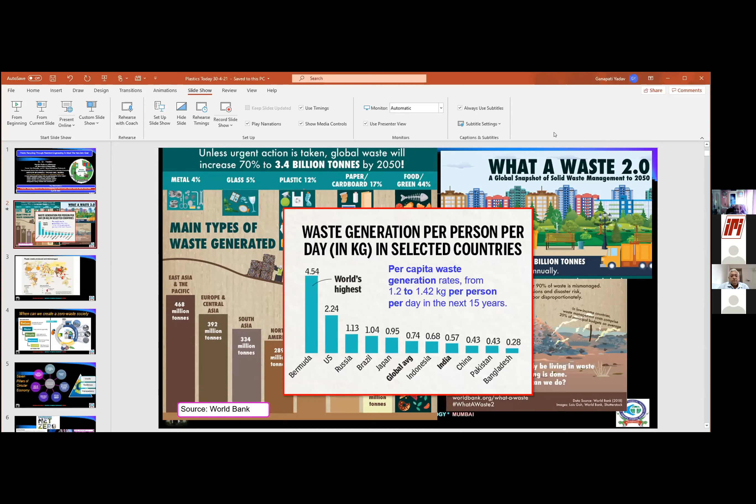Oh God, there is something. Okay, so you can see the waste which is generated... there is some problem here. Just one minute. I think, sir, you can continue. It's showing an advanced feature of the technology - whatever you're talking about is just coming on screen. But I don't want that. But that's fine, I think it's all the more better, sir - people can also read it and also hear you. Okay, all right, parallelly, all right, so okay, all right, okay.

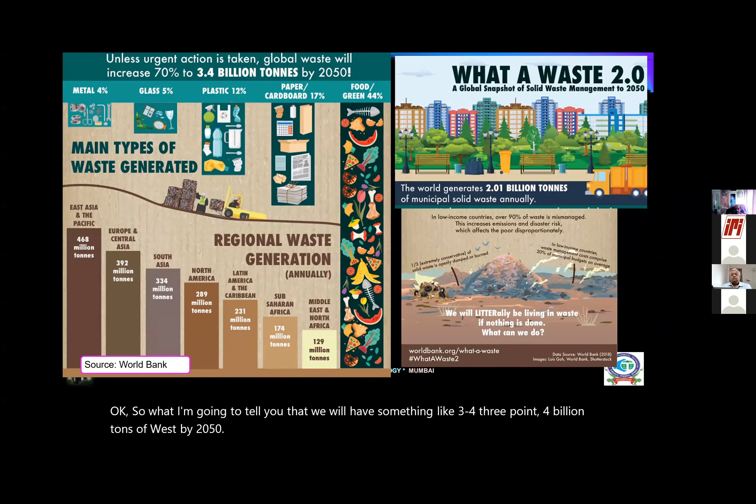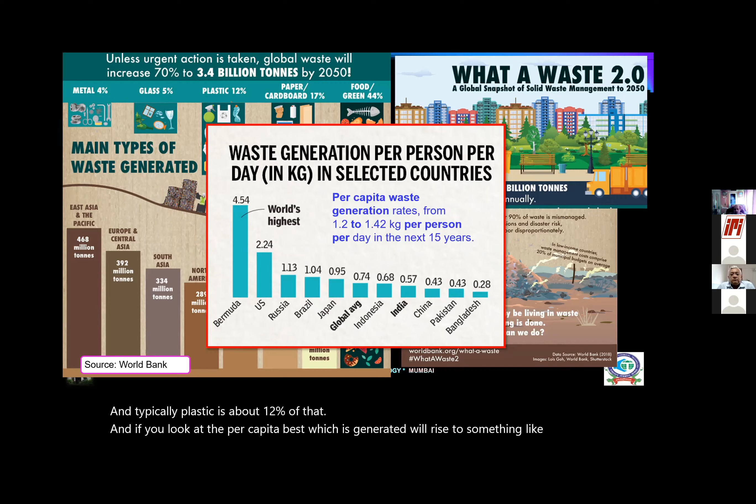So what I'm going to tell you is that we will have something like 3.4 billion tons of waste by 2050, and typically plastic is about 12% of that. If you look at the per capita waste which is generated, it will rise to something like 1.42 kg per person in the next 15 years. So what can we do - can we create a zero waste society?

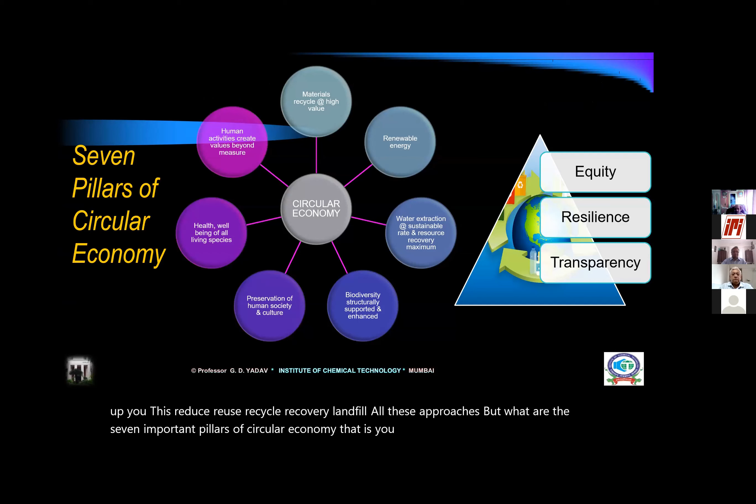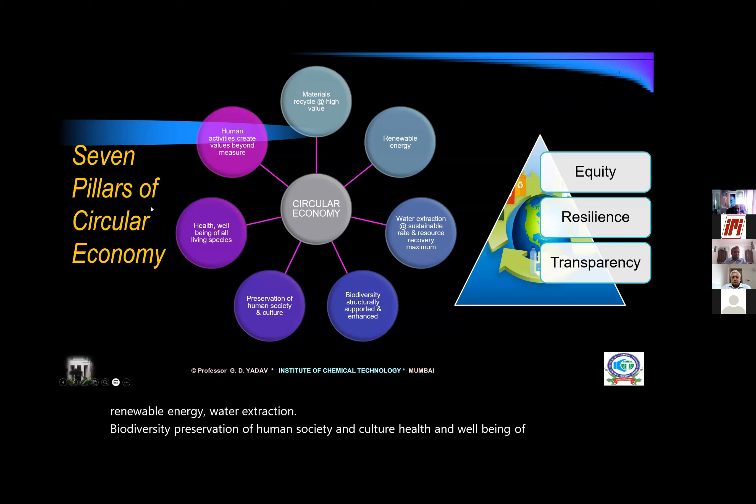And all of you know these reduce, reuse, recycle, recovery, landfill approaches. But what are the 7 important pillars of circular economy? That is, you have materials recycle, renewable energy, water extraction, biodiversity, preservation of human society and culture, health and well-being of all species, and human activities to create values beyond measurement. Okay, that is what it is.

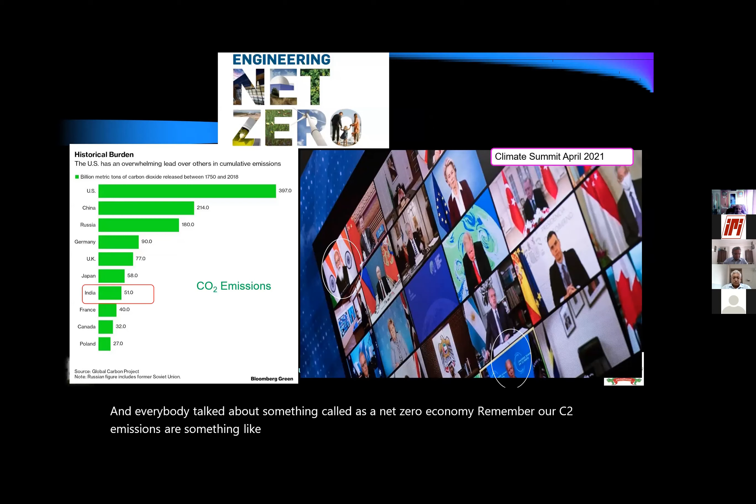And you heard last week there was this climate summit, and everybody talked about something called a net zero economy. Remember, our CO2 emissions are something like 51 billion metric tons. So now look at the CO2 going into the atmosphere: last year in January it was 410 ppm, this year it was 412, despite the slowdown in the economy. So how do you go for this so-called net zero economy?

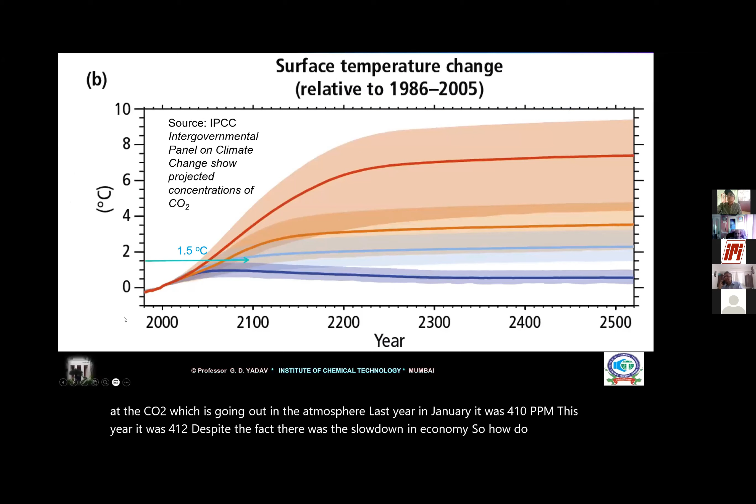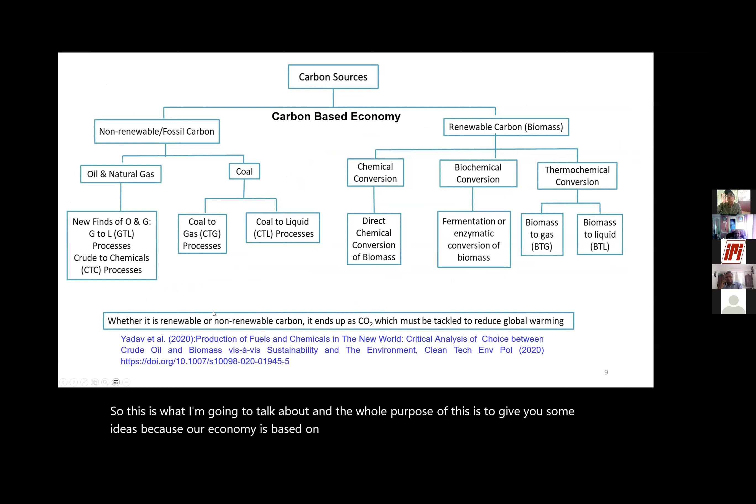So this is what I'm going to talk about, and the whole purpose is to give you some ideas, because our economy is based on carbon. Can we reduce carbon? Can we recycle? Can we reuse some of these ideas?

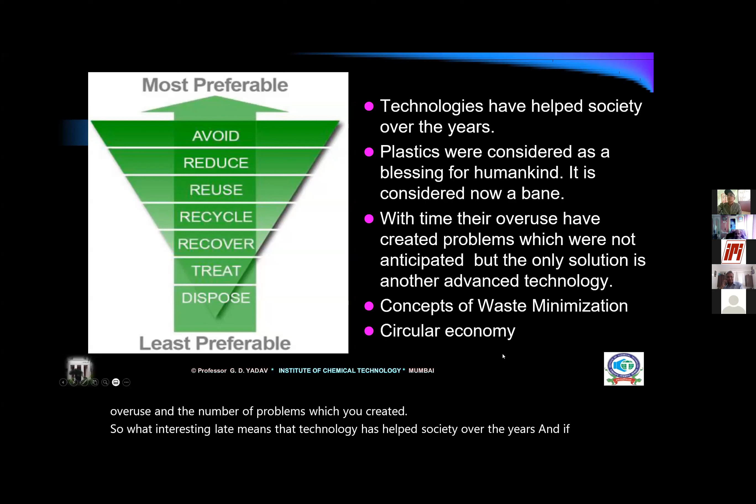One of the things is plastics. Plastics was considered a blessing for humankind, but now it is considered a bane because of overuse and the number of problems it created. Interestingly, technology has helped society over the years, and if one technology creates a problem, another technology will solve it. Since it was introduced, plastic has grown by 25 times.

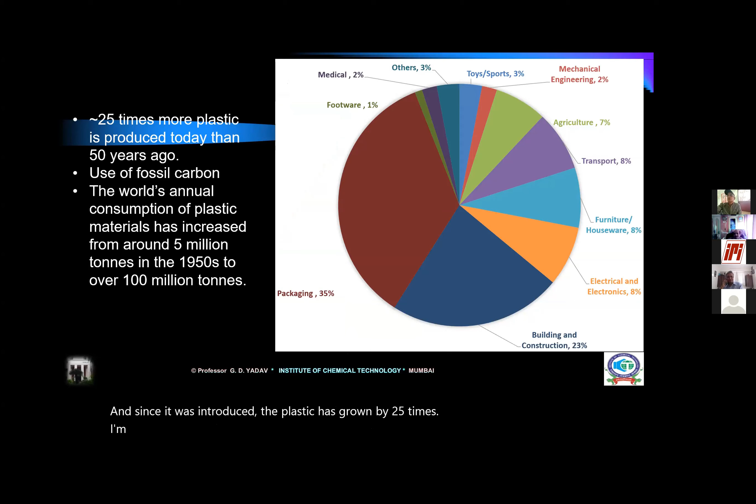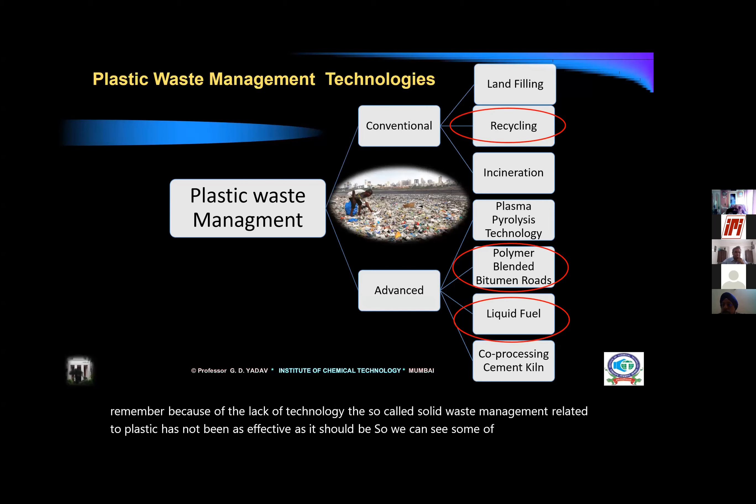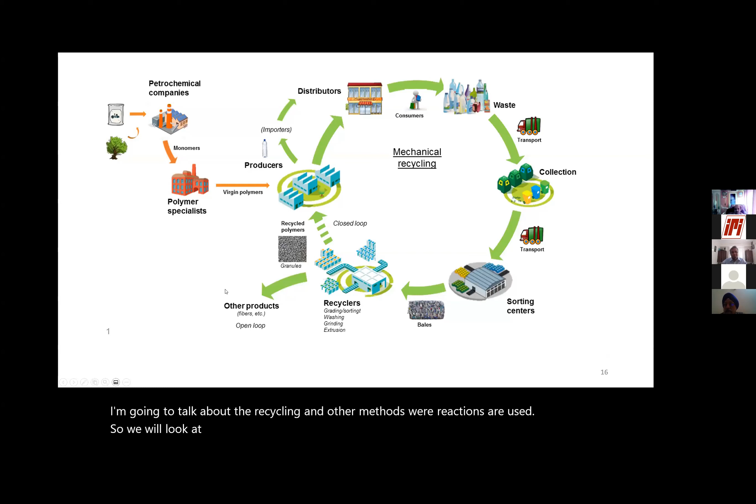So we can see some of these things, and I'm going to talk about recycling and other methods where reactions are used. So we will look at so-called chemical recycling processes. You have mechanical recycling and you have chemical recycling. In plastic waste recycling, I will consider the chemical and energy recovery part of the system.

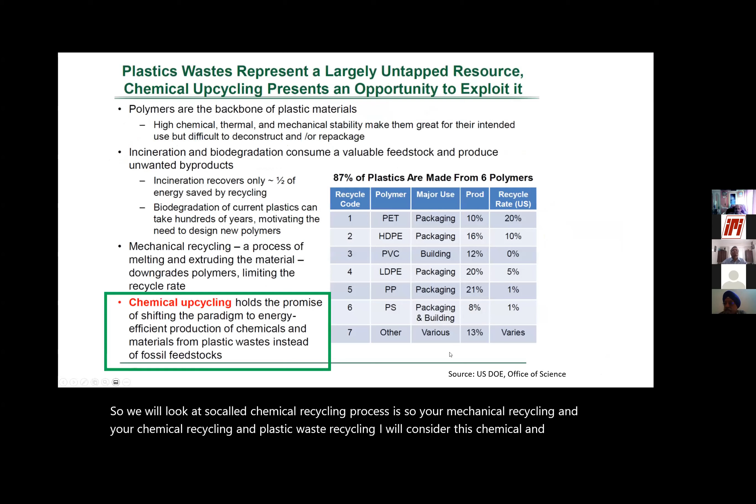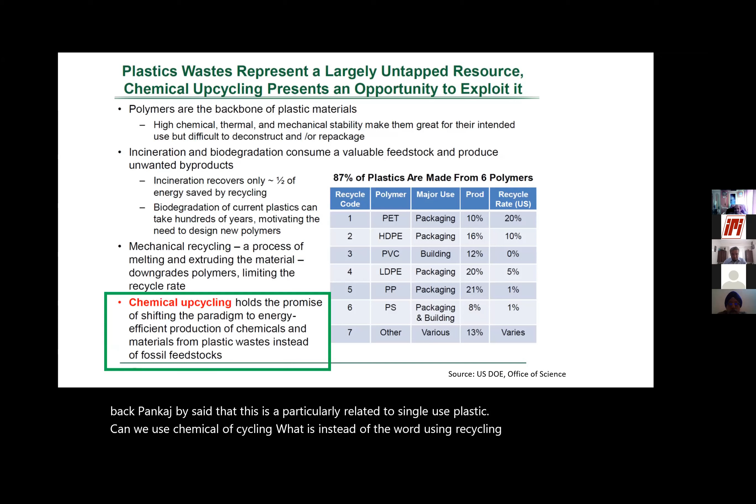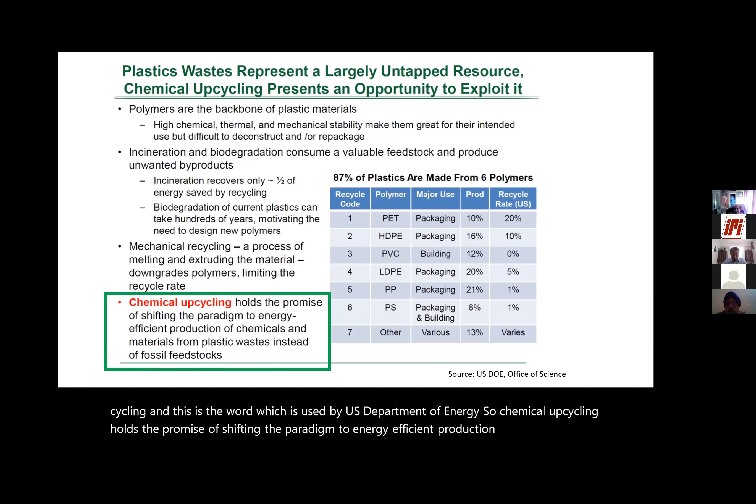Remember, plastic waste represents a largely untapped resource. Some time back, Pankaj Bhai said this is particularly related to single-use plastic. Can we use chemical upcycling? Instead of the word recycling, can we use upcycling? This is the word used by the US Department of Energy. So chemical upcycling holds the promise of shifting the paradigm to energy efficient production of chemicals and materials from plastic waste instead of fossil feedstock.

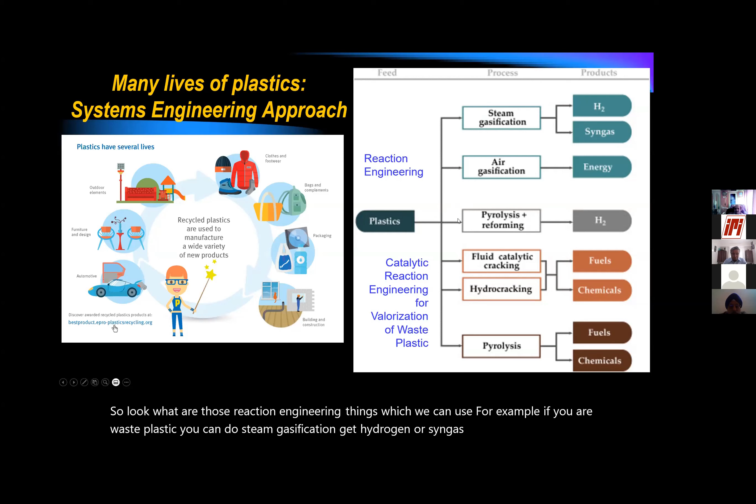So yes, in these recycling techniques we have chemolysis and thermolysis, and I will look at something related to polyurethane and other materials. So what are those reaction engineering things which we can use? For example, if you have waste plastic, you can do steam gasification to get hydrogen or syngas, air gasification, pyrolysis and reforming. Again you get hydrogen, FCC, and hydrocracking using hydrogen to make fuels and chemicals, and pyrolysis.

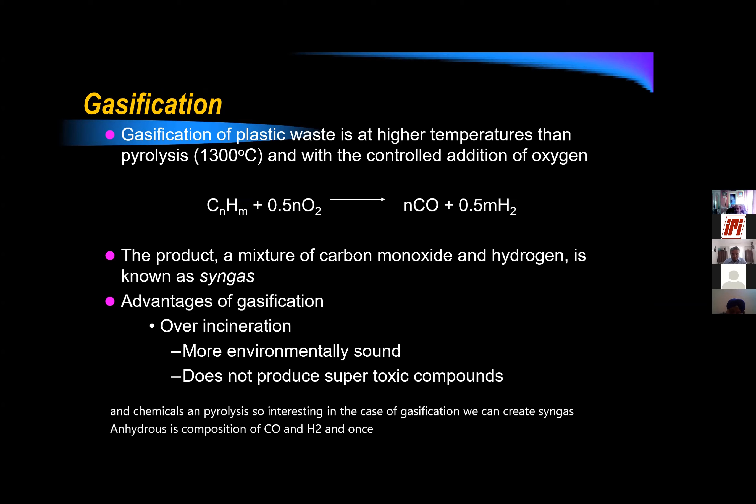Interestingly, in the case of gasification, we can create syngas and hydrogen. This is a composition of CO and H2. And once you have hydrogen, we can do many wonderful things in plastic reprocessing.

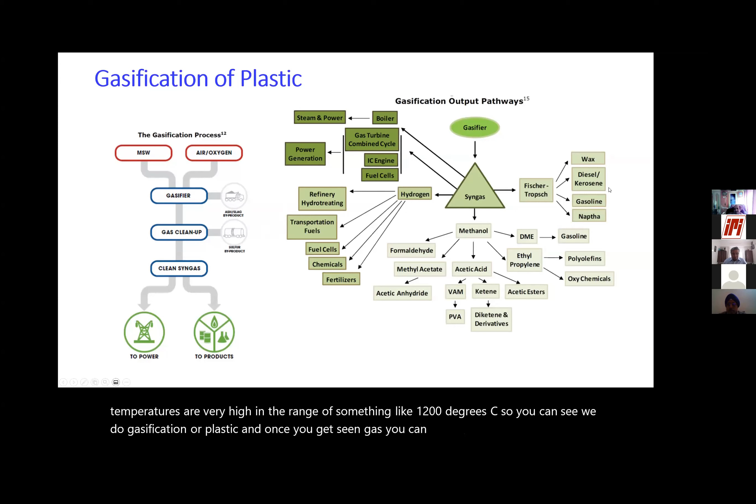In the typical gasification process, normally the temperatures are very high, in the range of something like 1200 degrees C. So if we do gasification of plastic and get syngas, you can create a large number of chemicals. The list is provided in this slide, particularly the one related to Fischer-Tropsch synthesis, or you go from syngas to methanol, dimethyl ether, gasoline, and so on.

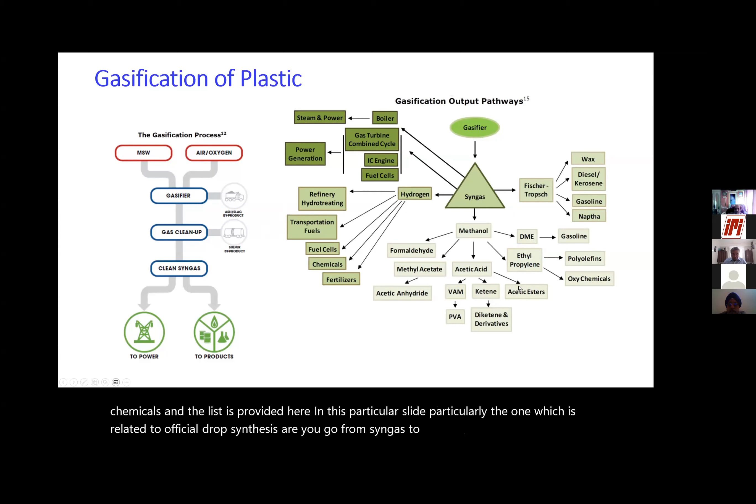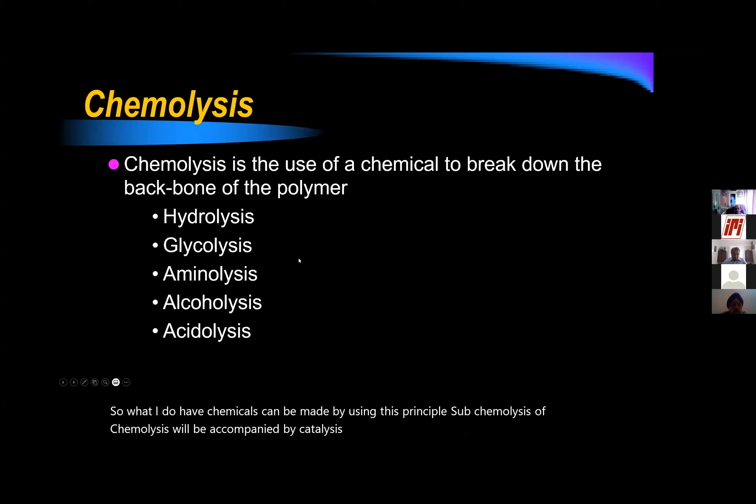So a variety of chemicals can be made by using these principles of chemolysis. Chemolysis will be accompanied by catalysis. And these are the reactions which you have: hydrolysis, glycolysis, aminolysis, etc.

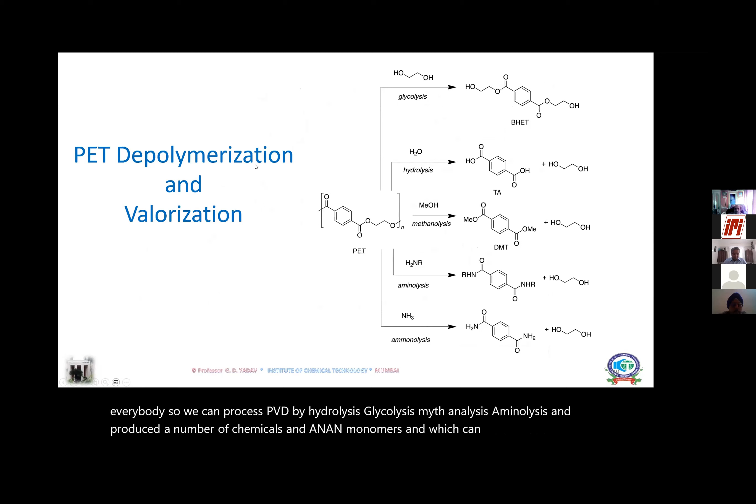For example, look at PET, which is a favorite of everybody. We can process PET by hydrolysis, glycolysis, methanolysis, aminolysis, and produce a number of chemicals and monomers which can be reused. So the depolymerization and valorization is a very important part. Perhaps PET is the largest plastic which is being recycled and reused. So these are the number of reactions.

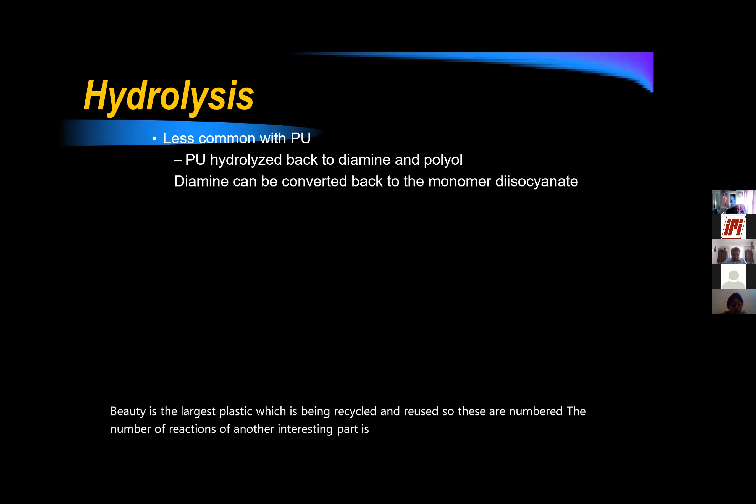Another interesting part is related to polyurethane. Polyurethane can be hydrolyzed chemically to make diamines and glycols. Or in the case of glycolysis, you use one of the glycols like ethylene glycol and glycerol to break down the polymeric backbone. And this is what is done in the case of polyurethane.

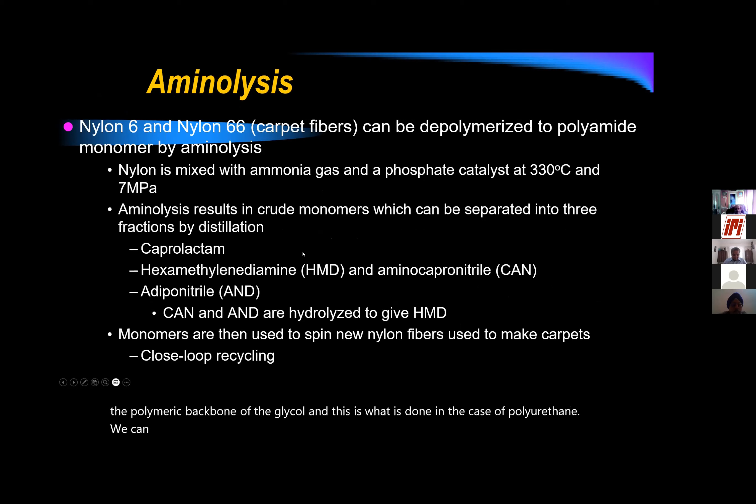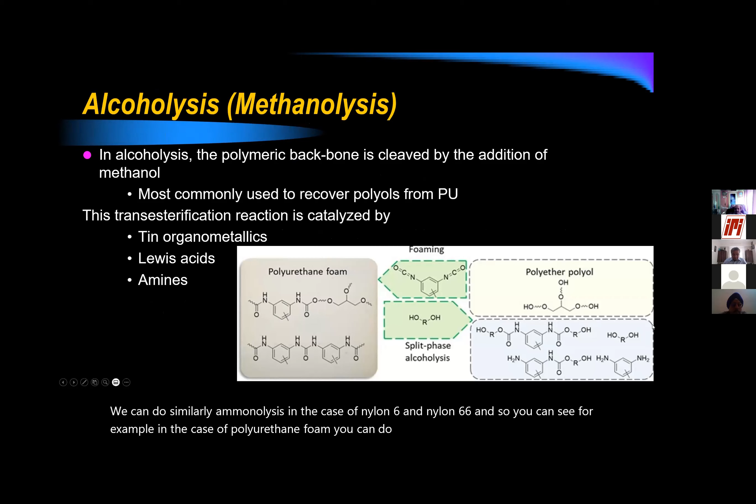We can do similar aminolysis in the case of nylon 6 and nylon 6,6. And in the case of polyurethane foam, you can do methanolysis and get polyether polyols, and you can split this by alcoholysis. So a large number of these products can be made from polyurethane foam.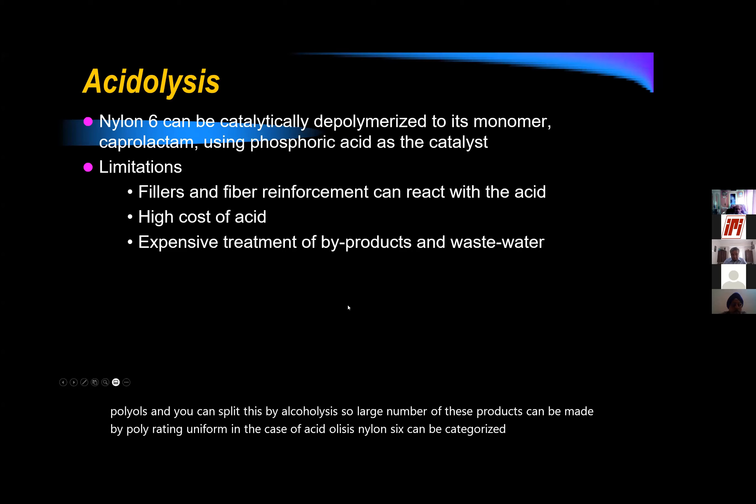In the case of acidolysis, nylon 6 can be catalytically depolymerized to its monomer caprolactam, using phosphoric acid as a catalyst. There are many other catalysts which can be used. So chemolysis will be very important to synthesize or resynthesize polymers.

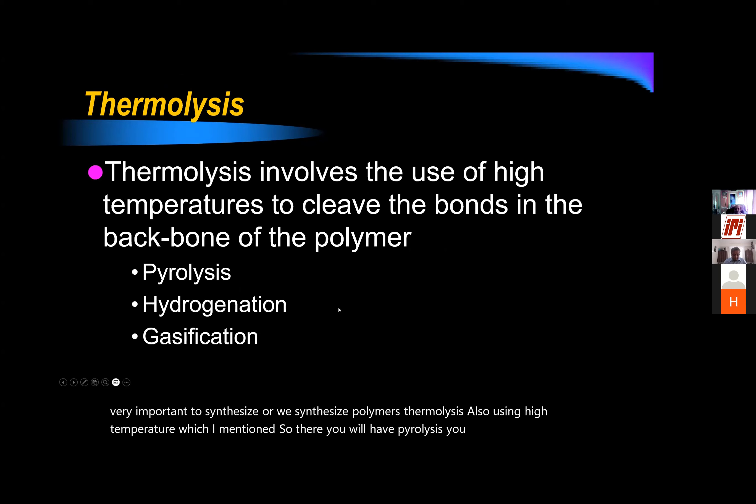Thermolysis also uses high temperature, which I mentioned. So there you have pyrolysis, cracking using hydrogen, so hydrocracking, and gasification. A large number of these processes have been developed in the literature, so you don't have to despair.

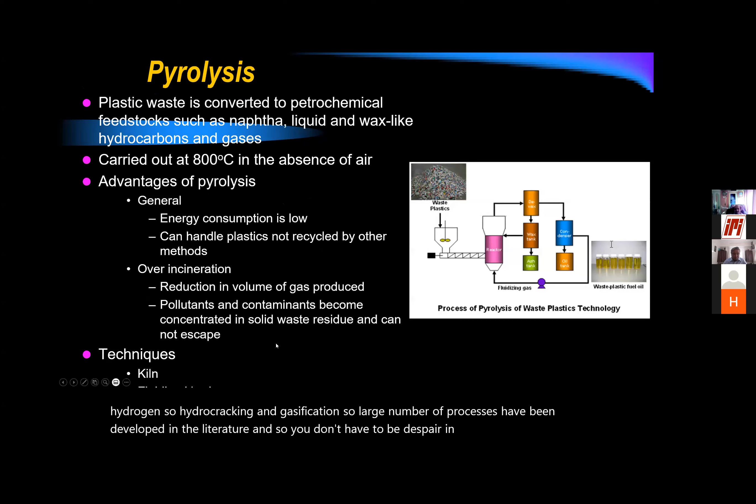We can use this waste plastic and do pyrolysis. There are techniques using kiln pyrolysis, and for example, when you have pyrolysis and you get a poor fuel oil, it has to be hydrogenated, and that can be done to get better quality oil.

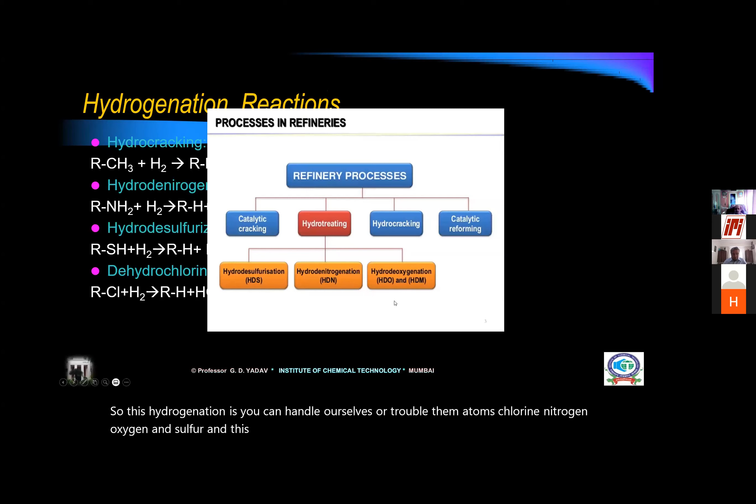This hydrogenation can handle all sorts of troublesome atoms like chlorine, nitrogen, oxygen, and sulfur. This is very well known in refinery processes. The same thing can be used for all plastic waste - PVC, PET, polyamides, rubbers, and whatnot.

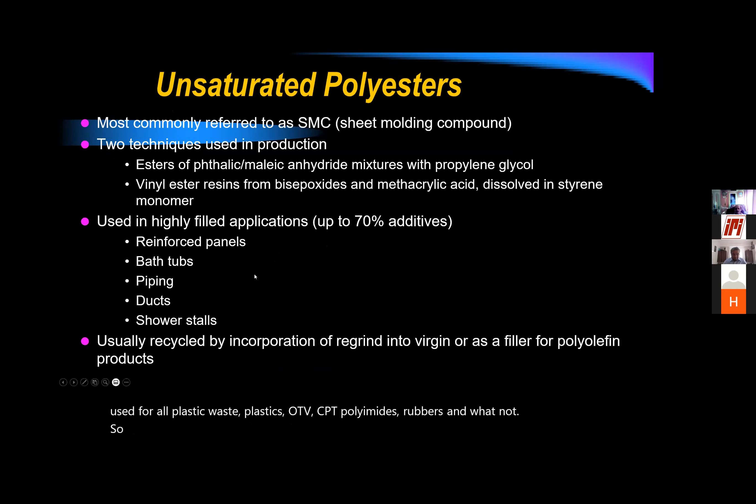Similarly, we can look at unsaturated polyesters, and all these polyesters can be reused. For example, you have melamine and urea resins - they can be recycled by partial regrind into virgin material.

For example, polystyrene foam is one of the biggest problems for the world, but we have many technical solutions. One very recent paper, which came out last year, showed you can produce hydrogen and methane from this styrofoam, and both of these are very valuable gases in industry.

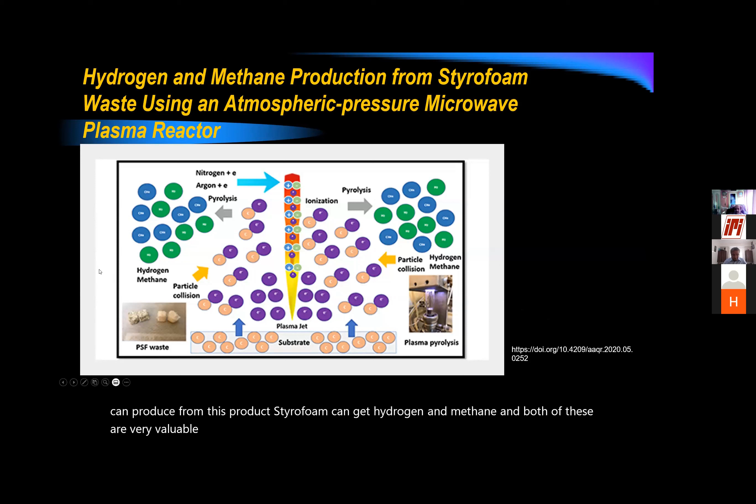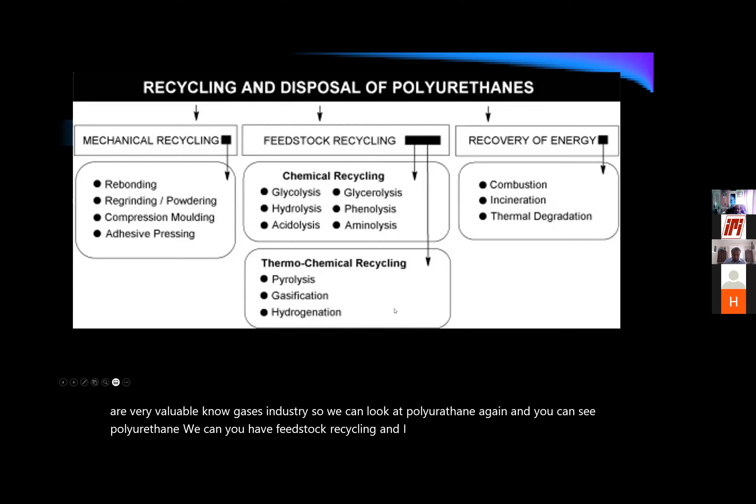We can look at polyurethane again - you have feedstock recycling, and I was talking about the chemical recycling. So many of these things you can have in polyurethane.

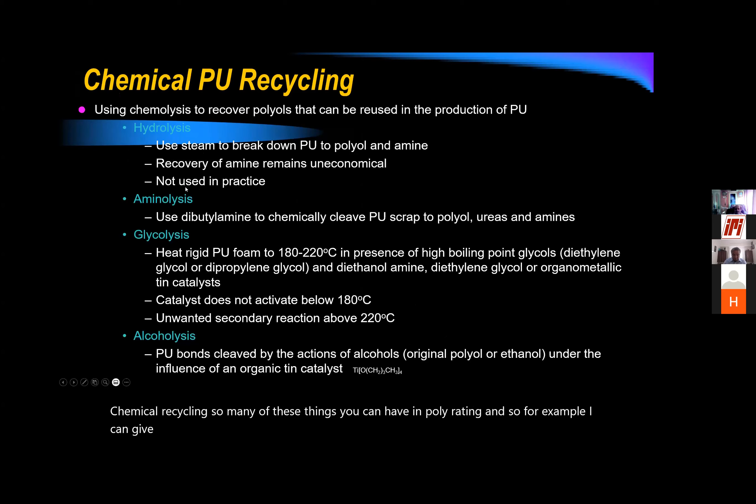For example, I can give you chemical ones like hydrolysis, aminolysis, glycolysis, and alcoholysis. All of these things are used for polyurethane, or we can recover energy. This means waste plastic doesn't have to be a burden on the environment - we can have smart technology, so we need to design better plants for recycling this plastic.

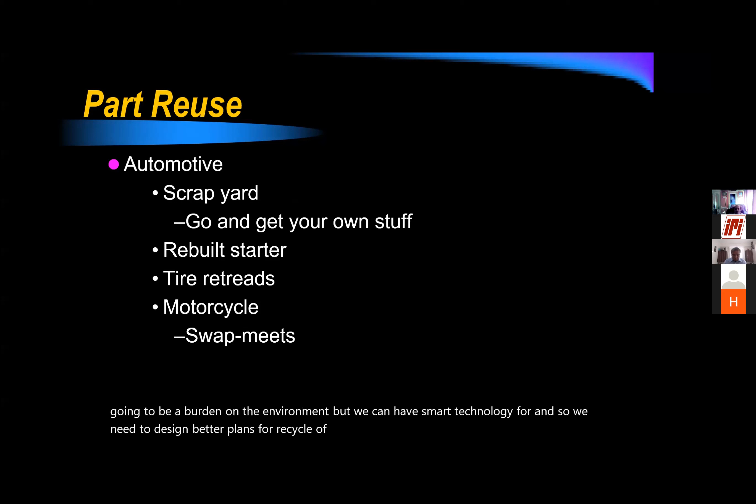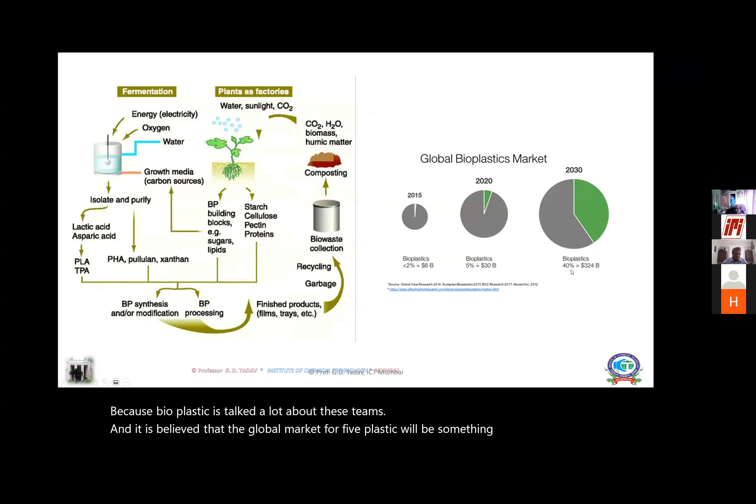Towards the last part of my talk, something related to bio-based plastic, because bioplastic is talked about a lot these days. It is believed that the global market for bioplastic will grow by something like 40%, reaching about 324 billion by 2030. So this is very huge.

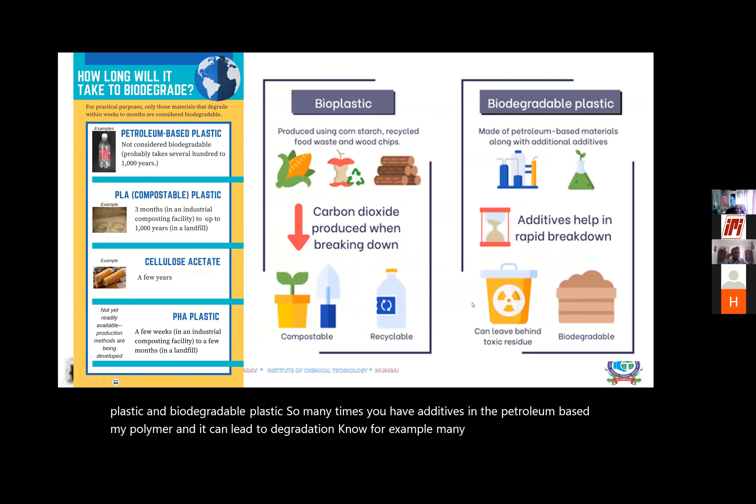There is a difference between bioplastic and biodegradable plastic. Many times you have additives in the petroleum-based polymer, and it can lead to degradation. For example, many of these bacteria start degradation by incorporation of oxygen into the molecule. So we know that we can do it.

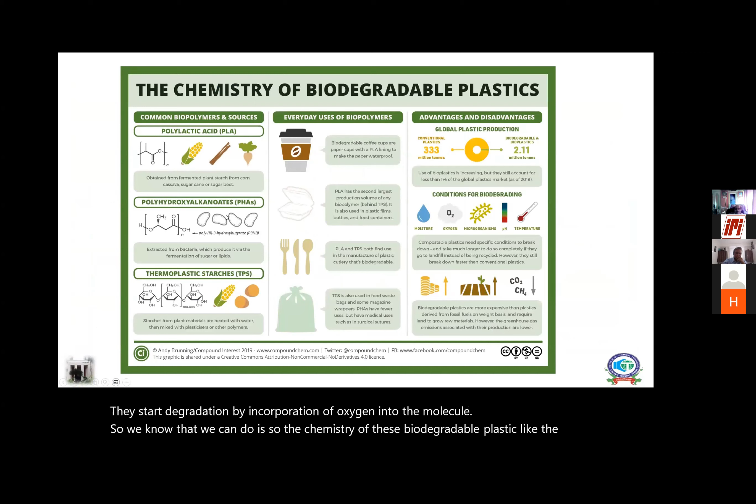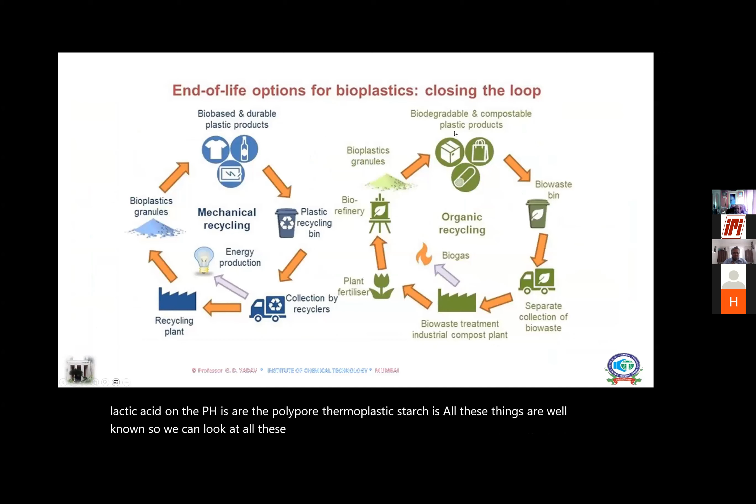The chemistry of biodegradable plastics, like polylactic acid and PHAs, or thermoplastic starches - all these things are well known. So we can look at all these things, and you have biodegradable and compostable plastic products, which can be recycled very easily.

Very recently, there was a paper by Chinese authors. What they are talking about is blending two enantiomer polymers inside a plastic that can withstand high temperature, expanding its usefulness further. And so, the so-called polymer upcycling - single-use plastics can be converted into a variety of new products.

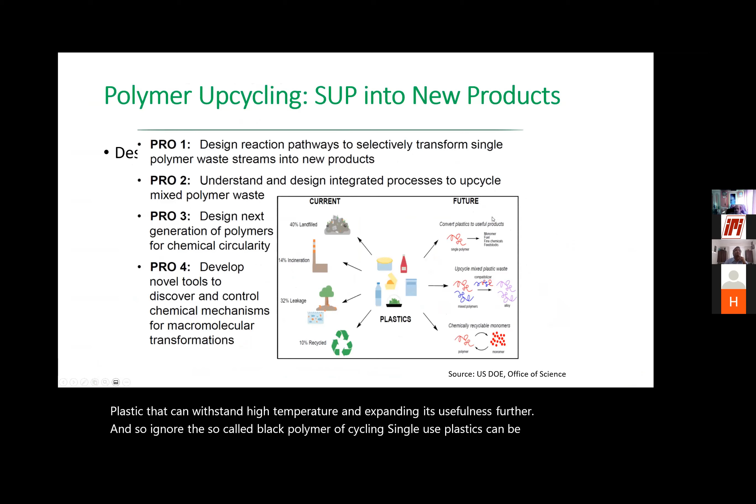We can convert into useful products. How do you do that? For example, you have to design new types of catalysts for depolymerization, including materials like polyethylene, which can be degraded into useful products anywhere between C3 to C20. So you can have a lot of fuels.

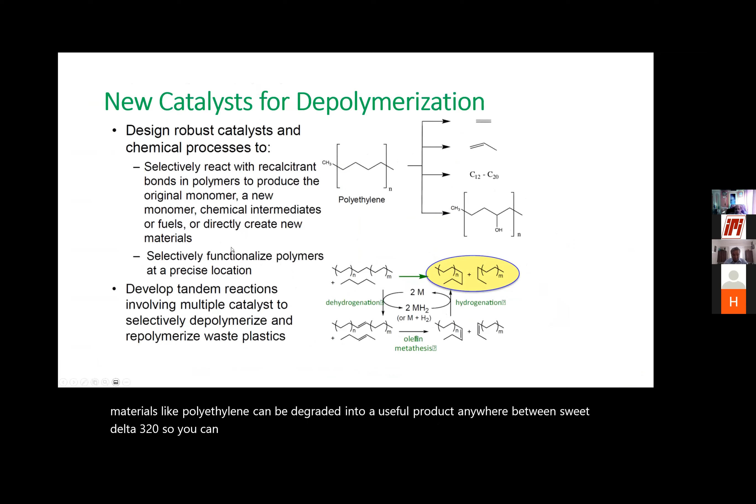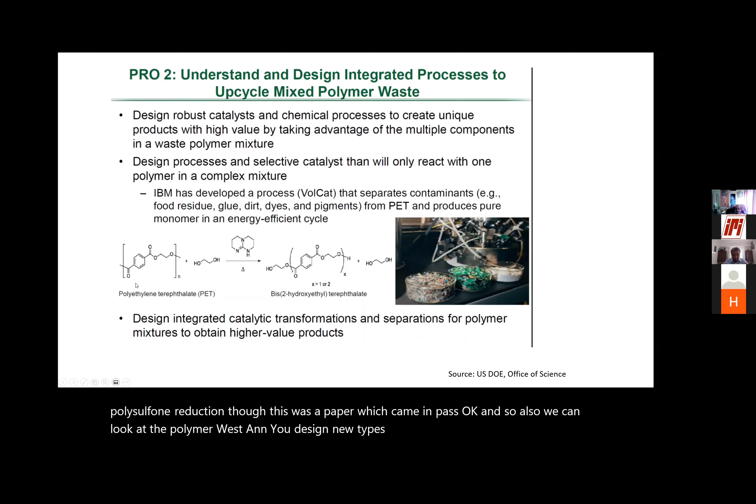In the case of next generation polymers for chemical circularity, we have to design and synthesize polymers with properties similar to or better than the current material. That is possible because of the lot of new developments in this field. We can also have new strategies for depolymerization and repolymerization, and that is what so-called upcycling means.

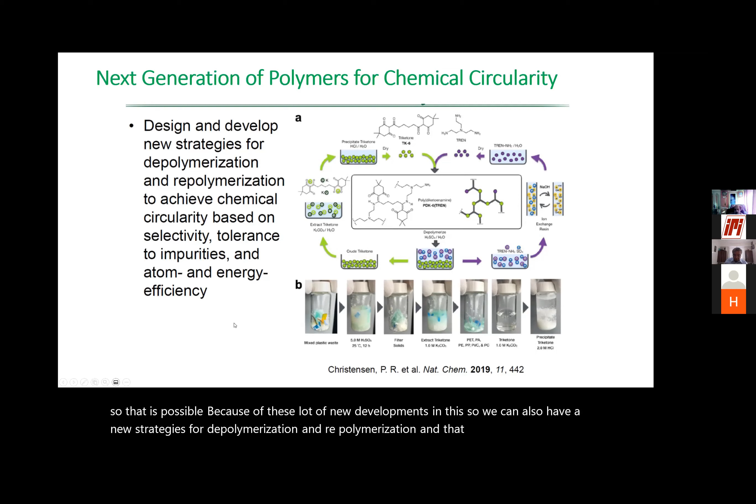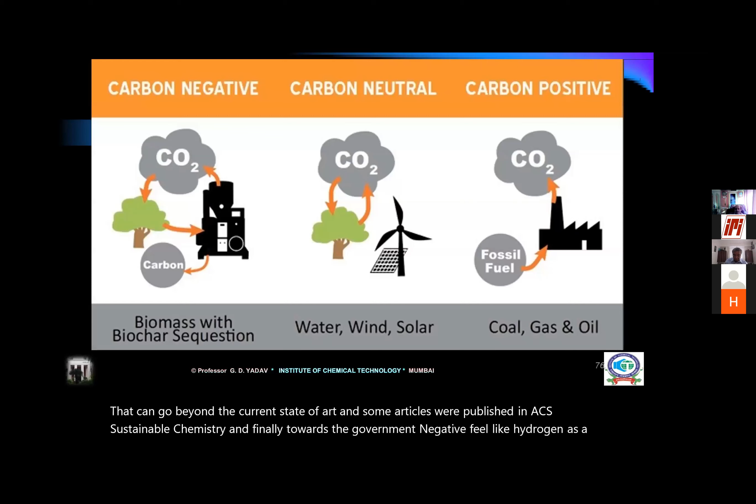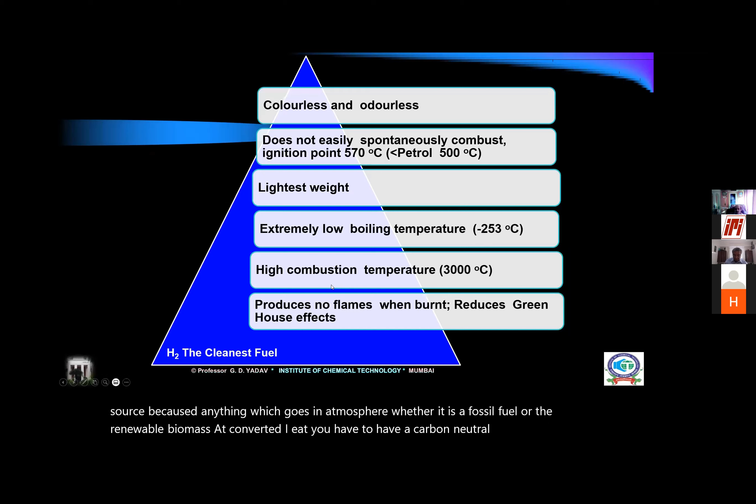So we have to understand, design, and develop reversible polymer chemistries that can go beyond the current state of art. Some articles were published in ACS Sustainable Chemistry. And finally, it was the carbon negative fuel, like hydrogen as a source, because anything which goes in atmosphere, whether it is fossil fuel or renewable biomass converted, you have to have a carbon neutral or carbon negative.

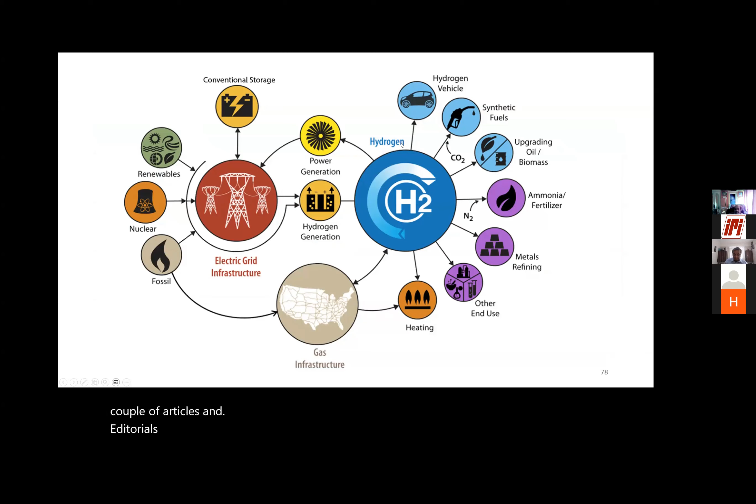So hydrogen is the best source, being the cleanest fuel. So once you have hydrogen, I wrote a couple of articles and editorials very recently in a newspaper. You can see, if you have hydrogen, you can have hydrogen vehicle, synthetic fuel, upgrading of oil, biomass, waste plastic, ammonia, metal refining, and many things. So hydrogen is going to be a very important source.

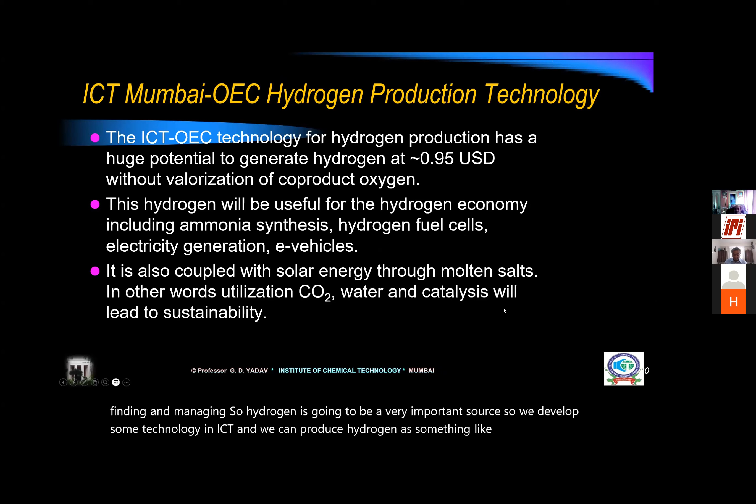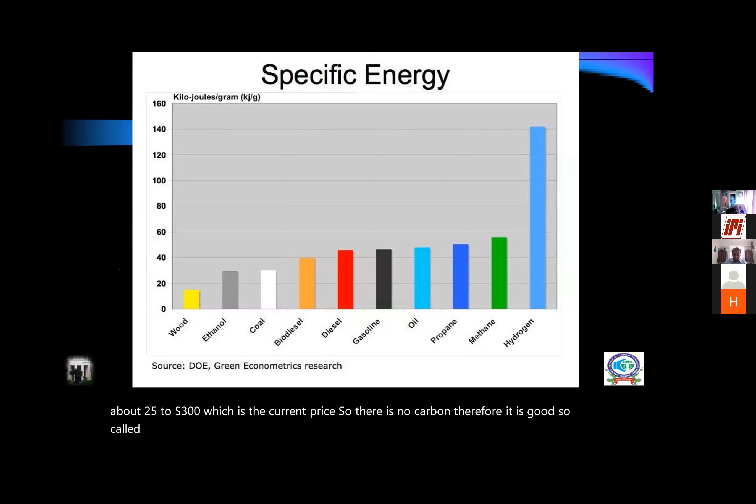So we developed some technology in ICT, and we can produce hydrogen at something like 95 cents as against about $2.5 to $3, which is the current price. So there is no carbon, therefore it is good. So the so-called net zero economy, it is going to help us. Hydrogen is going to help us. So there are many production technologies.

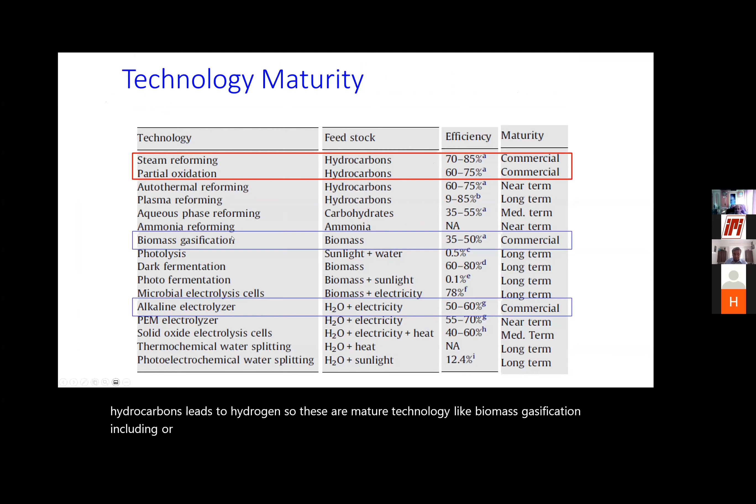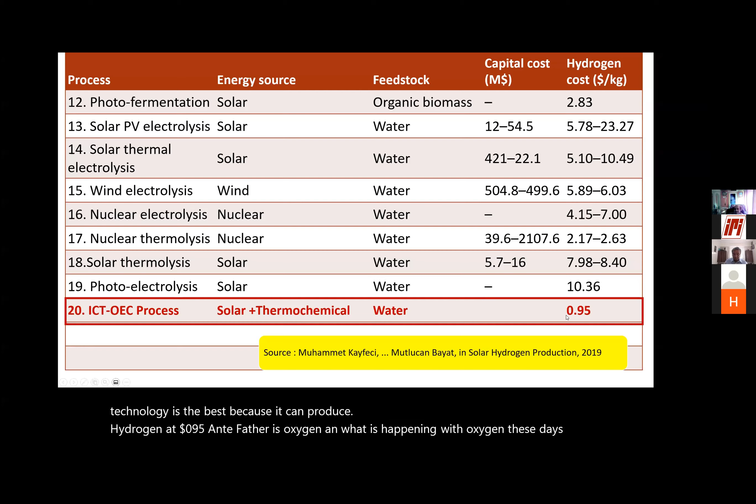Since I don't have much time, I will only go to the last part, that is the steam reforming and partial oxidation of hydrocarbons leads to hydrogen. These are mature technologies like biomass gasification, including what I told you about the waste plastic gasification. So in this particular case, we have compared something like 19 technologies available in the market, and we find our technology is the best because it can produce hydrogen at $0.95, and the other is oxygen, and you know what is happening with oxygen these days. So that does not include the valorization of oxygen.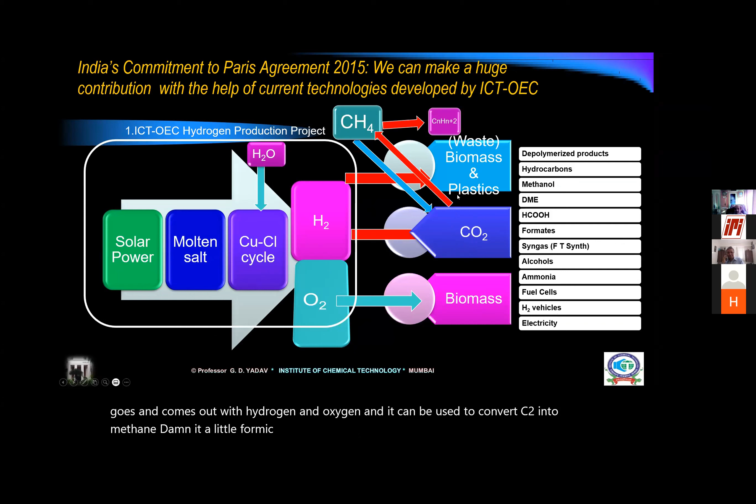So in our process, what we have done, we have solar energy, molten salt, we have a copper chlorine cycle where water goes in and comes out with hydrogen and oxygen, and it can be used to convert CO2 into methane, dimethyl ether, formic acid, and whatnot, including waste plastic. So you can see the number of products which can be made by using this hydrogen, including formic acid, which will go in fuel cells and whatnot.

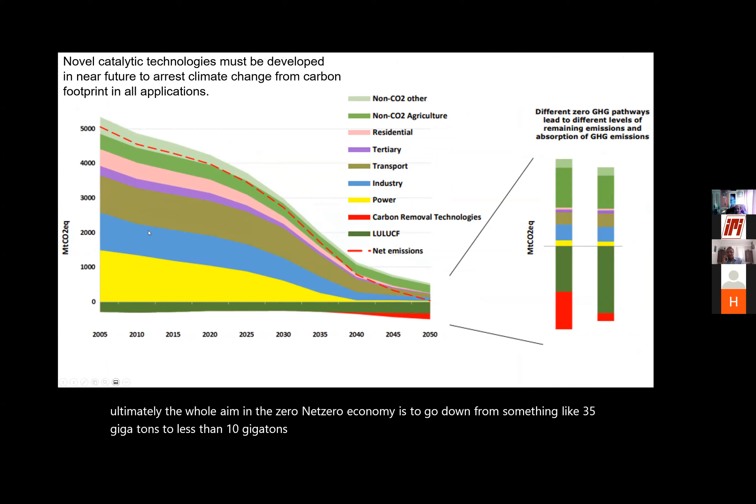So yes, ultimately the whole aim in the net zero economy is to go down from something like 35 gigatons to less than 10 gigatons of carbon dioxide in the atmosphere by 2050. So this is where the whole thing is. So finally, we will have a great future. Polymer people or the plastic fellows will not worry about it.

Nothing should be taken as waste because we must aim towards a zero waste society. Polymer upcycling is deconstruction and reconstruction of waste polymer for its valorization. So plastic can be recycled chemically with proper strategy, including depolymerization. The environment will protect it. So catalytic reaction engineering will be the tool for this.

Hydrogen will play an important role in net zero economy. And hydrogen economy can be elegantly intertwined to make many, many chemicals from waste carbon sources, including biomass, plastic, and C1 off gases. And government of India should adopt hydrogen economy to meet the demands of the Paris Agreement. That is the only way to meet the goals of the Paris Agreement. And of course, there will be many technological challenges ahead, and I'm sure science will take care of it. Thank you very much.

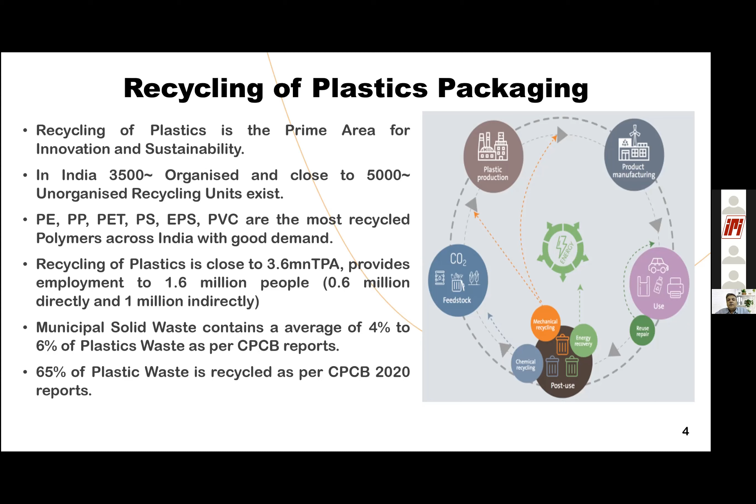Municipal solid waste contains an average of 4% to 6% plastic waste as per CPCB reports. 65% of plastic waste is recycled as per CPCB 2020 reports.

What are the current issues we are talking about? One is the regulations coming in - the new PWM guidelines, the new EPR rules, the SUP rules. They are all going to hamper the plastic industry, and even the recycling industry. Because today, if you see the new PWM rules, recyclers are part of the EPR Act. They are part of the PWM Act, they have been made part of it too.

Reasons why plastic recyclers are unorganized is purely because of the regulations. The pollution approvals required for becoming an organized recycler are not suitable for each and every recycler. If they really want to follow the norms, they have to change all their equipment and the way they are doing recycling. And if they change the way they are recycling, they will not be able to do the recycling they are currently doing.

Really, if you want to see the way unorganized recyclers are doing it, I think Samir can take you to a few of these recyclers who are doing all the road waste recycling and still surviving.

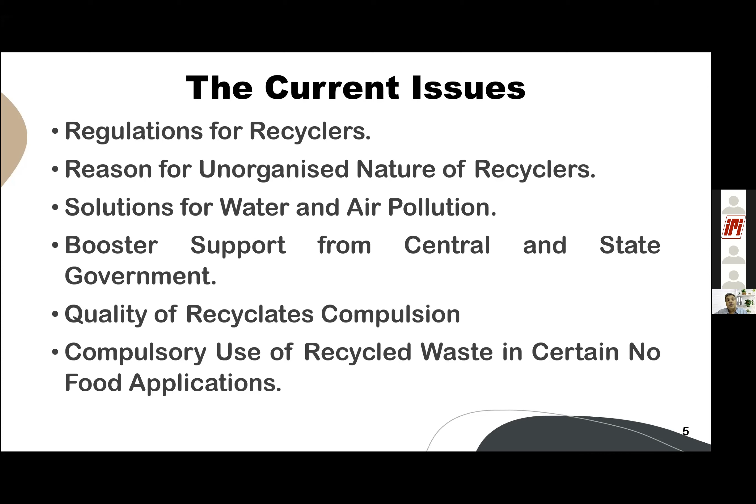Plastic waste management 2021 onwards, what would be the needs post 2021? One is, as I said earlier, improvement in recycling technology. Latest trends of equipment should be required. Recyclers would need to follow the guidelines for plastic pollution regulations and have equipment which would adapt to those regulations. They would need ETP plants for water recycling and reuse. Water is going to be a shortage in the future, so more and more regulations will be there from the government.

India would have to have social and environmental responsibility. A zero waste economy would need to be implemented if India needs to be totally plastic waste free. The number of dumps that are increasing in India need to reduce, otherwise India would be flooded with just waste. Sustainable solutions for value recovery of plastics is the most important point that needs to be taken care of.

Is it moving down? Oh yeah, it's going slow. Just a moment.

About Recykal quickly, we are a waste management company, and what we are trying to do is enable waste commerce through a digital marketplace. We connect all stakeholders in the ecosystem, from generators to processors and recyclers, bringing them onto a single platform. We come from a background of e-commerce and SaaS, and we are technocrats, so we are trying to use our expertise and knowledge in waste management to see what we can do better in this space.

Each transaction that happens needs a lot of transparency and traceability. Today, we are working with more than 100 brands, around 150 recyclers, more than 54 municipalities, doing almost 10,000 plus metric tons per month, and working with all the bulk generators.

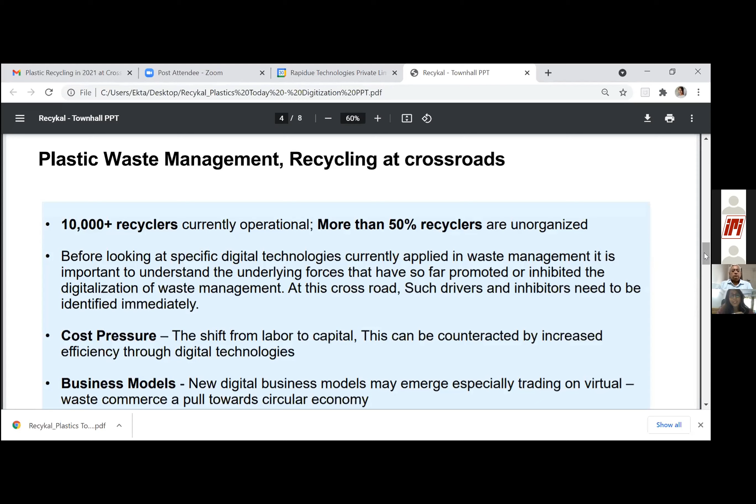But what inhibits it is cost pressure and identifying the right business model. These are the new things we need to work around and understand what would fit best. Digital technologies come with a promise of a more efficient process, better sourcing of valuable material in the waste stream, and an effective link to other sectors for a complete circular economy. I think that is what Sir was presenting in his previous presentation.

At Recykal, we have tried to build apps where the collection process to disposal process can be tracked. There are various generators, then somewhere collection is happening, and then there is a point where it is disposed. Disposal largely today is reaching the landfills and water bodies where it's mismanaged.

That's why people are saying say no to plastic, and we want to say yes to plastic. We all know it's a beautiful material. It's bringing so much ease to our life.

So what have we done at the informal sector, the generator level, consumers and bulk generators? We have tried to digitize. There are apps which connect to the collection centers, the nearest collection center in the particular city or locality.

Today, the most important inhibitor is also the price factor. Do we really know what's the fair price of the material? There are so many types of plastics and there's no proper uniformity. So there's an online catalog for market rates as per current trends that we are trying to maintain.

We are trying to bring this segment of small kabadiwalas and waste pickers access to banking so that there is online payment transaction. Today we are all in that space of GPay, RTGS, NEFT, so why cash transactions? In the COVID situation, everyone has learned the power of online payments. Every sabjiwala or fruit vendor has got a QR code in front of his cart, so this is very easy and it can be done.

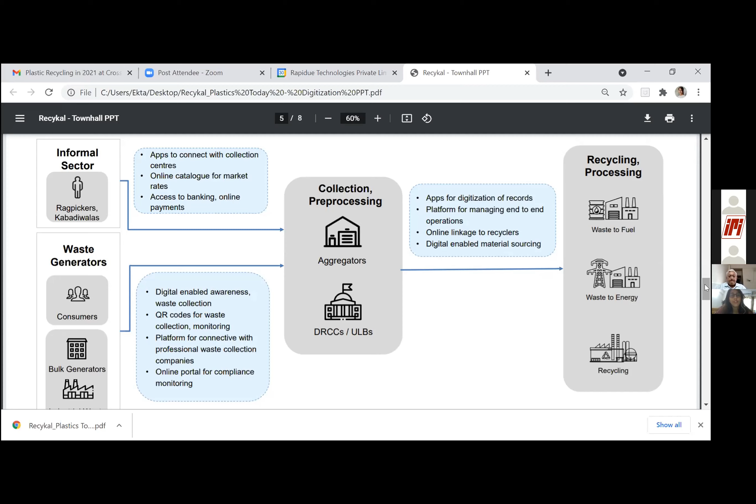That's what we are bringing at Recykal - waste commerce. We've all heard of e-commerce, but yes, it is time to have waste commerce, because it is not waste, we know it's material, but we still have to use this word. I hate to use it, but I'm forced to because I cannot create a new word suddenly - people have to understand what we are speaking about. So we still use the word waste, and that's where we are trying to show the value. As Sir was just speaking, value recovery of plastic - that's where Recykal is working.

So the digitization part I explained in my previous slide - we've built certain products. At the consumer level, we have an app called Used. At the business level, for bulk generators, we have the Recykal Business app. Using these two, an individual or a bulk generator can create a request and ask for a pickup of waste material from his premises or house. He would know where the material is going, and he would get incentivized or paid for that material, because we know there's value to it.

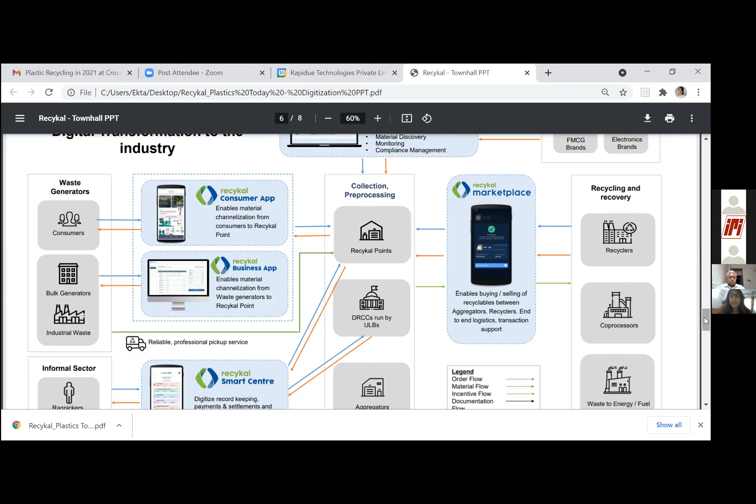So this is the marketplace that's getting created. In the process, we know EPR is in place for brands - electronics as well as plastic. These brands need EPR fulfillment and complete traceability of the entire transaction. So we're supporting the brands through this complete process - they get the right kind of documentation, and their EPR targets are taken care of. That's what we're doing at Recykal, and these are the benefits it brings.

So why should we have this? Definitely because of easy access to new buyers and sellers. Today there are so many people collecting plastic, but what is happening to it? Is it really reaching the right buyer? How can I open a market for somebody collecting plastic in Hyderabad or Mumbai? Can he sell from Mumbai to Hyderabad, or Mumbai to Delhi? Yes, it's possible through this Connect platform we're working on. This helps them fast-liquidate the material.

Once this is happening, there will be more value to the material, and once the material is getting utilized, people will not say no to it - rather, they will start more business around this. There is complete traceability, which is what the government of India wants - they want to know what's really happening to it. So this digitization brings transparency and traceability, and the most important thing is operational efficiency - that's key.

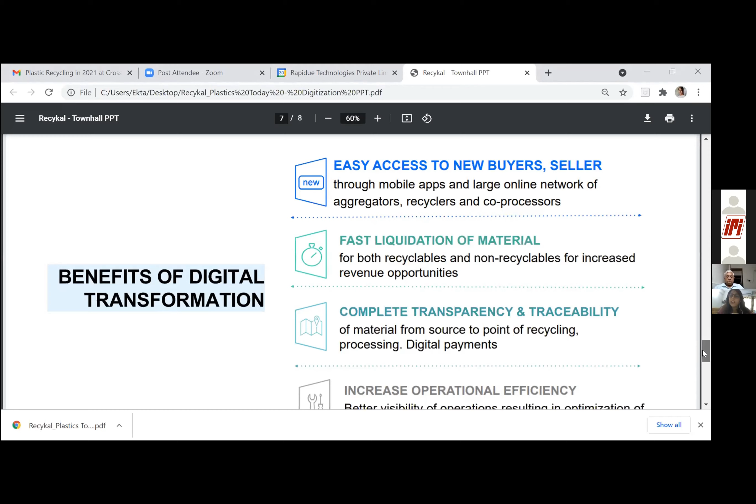Digitization is not an end in itself. The application of digital technology should rest on its ability to create new changes or solve existing problems in this sector, and this is possible only when we connect things through the right technology and spread awareness. So I think that's what we need to do while we're at this crossroads - together spread the right kind of awareness and make this beautiful material exist to protect us, to serve us better in the long term.

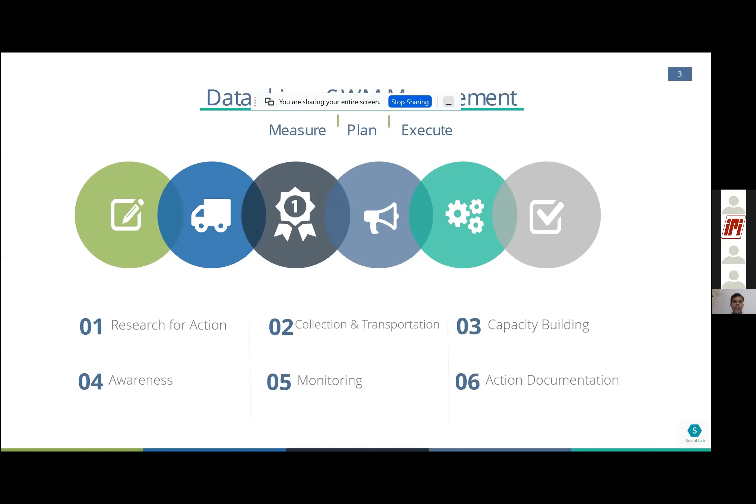Coming to EPR, before seeing the role of EPR in 2021, we'd like to see what has happened on the EPR front till now. Taking the case study of Maharashtra and the work done by Social Lab, we can see that till now we've secured progress on 3 fronts.

First is the registrations as per the plastic waste management rules. Till now, the Urban Development Department of the Government of Maharashtra has provided endorsements to the action plans of various producers and brand owners, and because of these endorsements, the MPCB has started giving registration under the plastic waste management rules. Though MPCB is a pioneer in activities like the plastic ban, it was seriously lagging in giving registrations to producers and brand owners. But there's good news: recently, in the last month, MPCB has granted registrations to some producers and brand owners.

We consider this one of our achievements. This was possible because we were able to show ULB tie-ups all across Maharashtra in the action plans of our various producers and brand owners. Till now, we've been associated with more than 33 ULBs in Maharashtra, ensuring we are collecting and scientifically disposing of recyclable and non-recyclable plastic from across the state. However, the most important thing in ensuring that volumes of plastic waste get scientifically disposed of is target fulfillment.